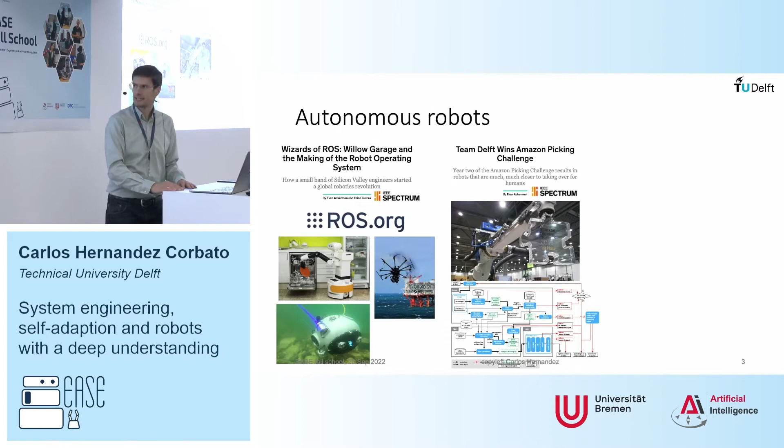The next highlight, this is from us in Delft. We actually did what I was mentioning. We put the state-of-the-art algorithms into a robot that was capable of bin picking in the Amazon Picking Challenge. We won it one year, and I have to say there was not much research there. We took the state of the art, we used the best of our expertise to integrate such a system, and it was successful. So it seems like, oh, we can just make autonomous robots now.

But you all know that we are far from there, so the third highlight is: okay, when things are really complex and open, we are not yet there. This is a standard example of a robot falling in the DARPA Robotics Challenge, right? This is a bit unfair because robots were capable of doing much more than just that in that challenge. But the point is, at some point, almost all the robots got into trouble, big trouble, basically.

Under the image of the robot falling, there is the engineering team. This is a picture not of them designing the system, but of them probably controlling it, because some robots were only partially autonomous, with others supporting, like saying, I know about this algorithm, so this is what is happening. So there was a lot of knowledge in the room, including humans involved in the design of the robot.

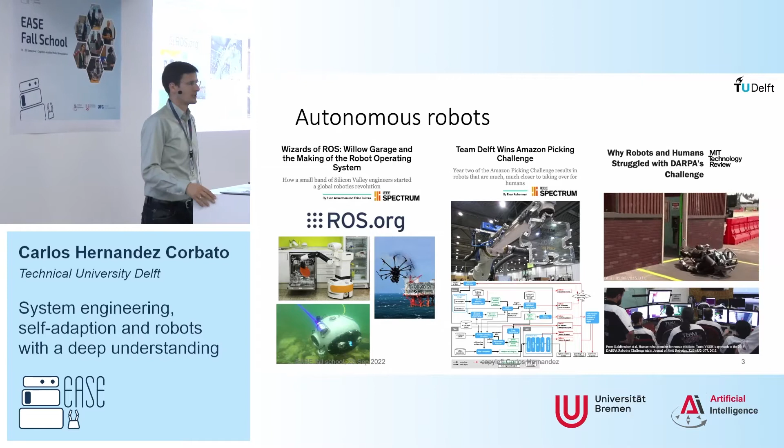So this is the picture of where we are, I think, in developing autonomous robots from an engineering perspective. The question is, it seems to be a problem to integrate them to make a complete application. This is the problem of robot control software architectures, when we put everything together in a software architecture that needs to run in a real robot.

So what is the problem exactly? I hope you are familiar with the three-layer paradigm in robotics. Every robot has its own architecture, but people typically assign these layers: a deliberative layer, an executive layer, and some control skills at the bottom. The top level does the planning, gets the mission, the task the robot needs to make, the human level understanding of it, and processes that into commands closer and closer to the variables in the world—the sensory motor loops, basically forces, speeds, pixels in an image, etc.

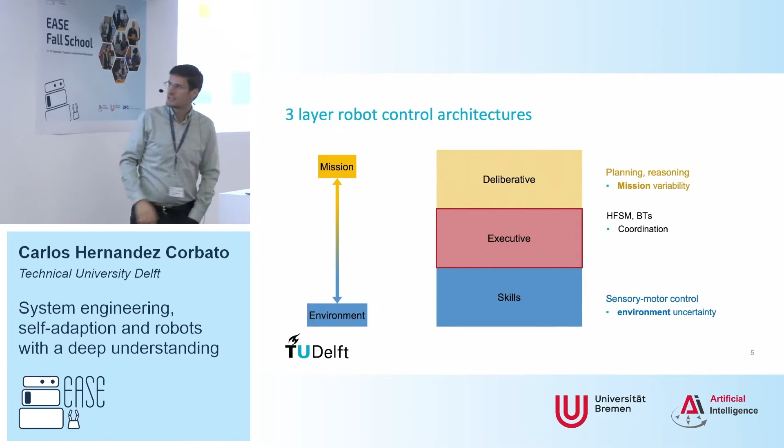So basically, there is abstraction in the processing in the robot that goes from the mission closer to the environment. It's clear what is in the deliberative layer and what the sensory motor control does, handling environment uncertainty. But what's going on in the middle part, in that executive? Typically, people use coordination mechanisms like finite state machines or behavior trees, now very trendy, to coordinate the execution. But that's not the only thing happening.

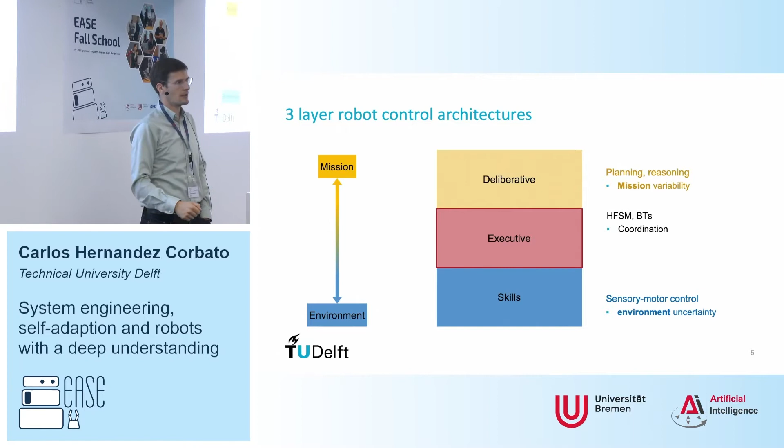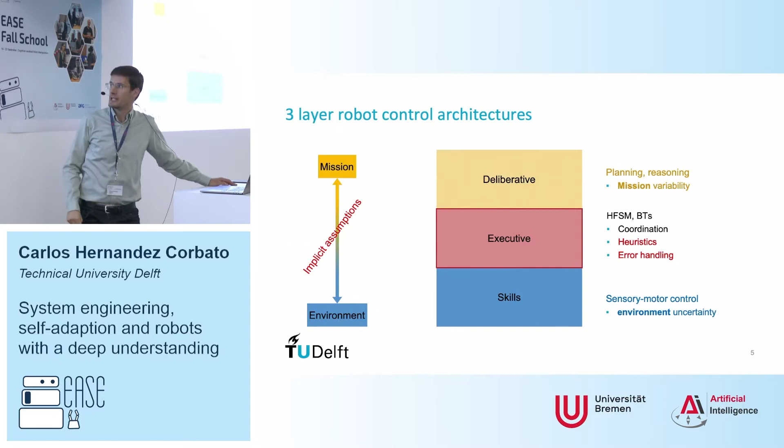How many times were you trying to plan a path and move, or your planner could not find a solution in the middle of the application? That's a problem—how you cope with that. Then you keep trying alternatives, tuning it so that it works in your scenario. Then you put the robot somewhere else and it stops working, it cannot find a plan again. So there are a lot of heuristics based on the application and error handling going in there. And those are different from the abstraction, the composition that we were talking about.

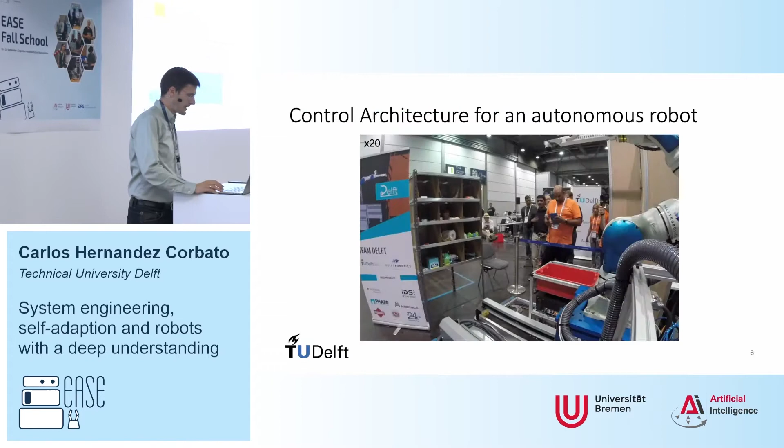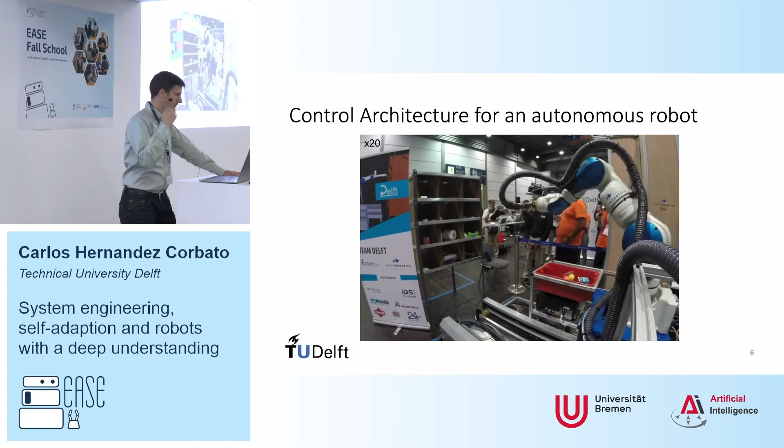So a concrete example of what is going on here. Our system was basically a pick-and-place system—I'm not going to explain it, I think everyone here knows how this works. We were using RGBD to detect the objects and their pose, standard algorithms from more than six years ago now, I think.

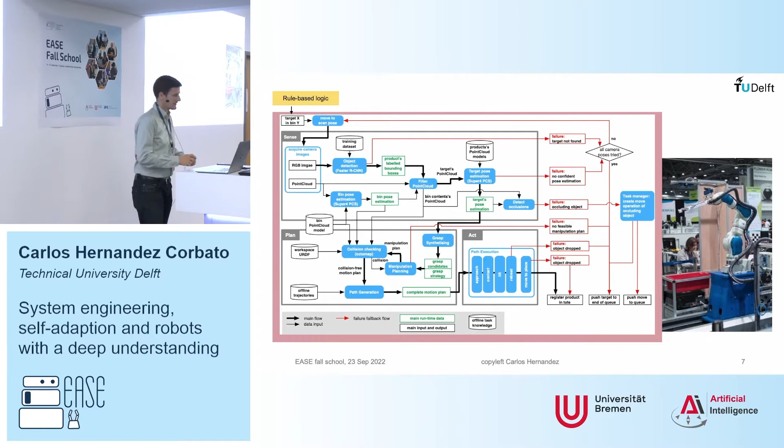Maybe the pose estimation was not certain enough to be confident to plan the motions, or there was some occluding object, or there was no plan found to move the gripper, the end effector, or the object dropped, for example. Many of those are just cramped in there. And no matter how clean you try to make this, everyone struggles.

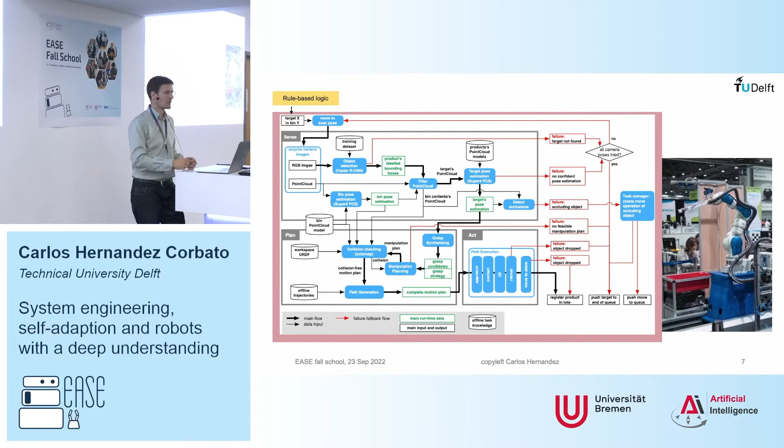In the best case, maybe someone taking care of the design of the system puts it somewhere that is actually more findable. But the whole point is, the whole reasoning of the robot is not aware of that. There is no reflection on that. There is no declarative knowledge about that in the system.

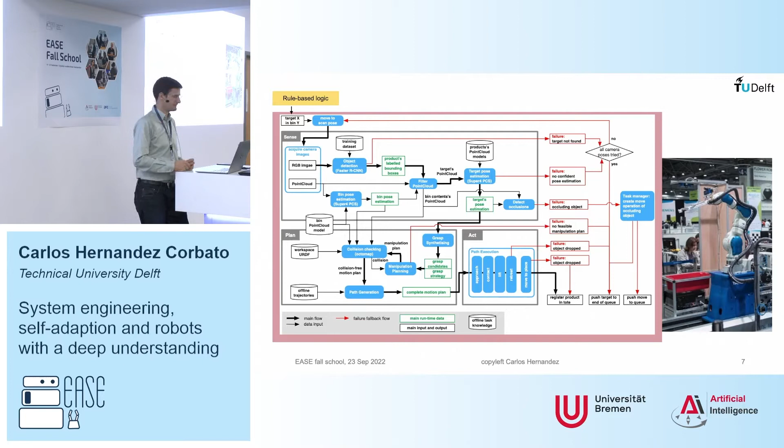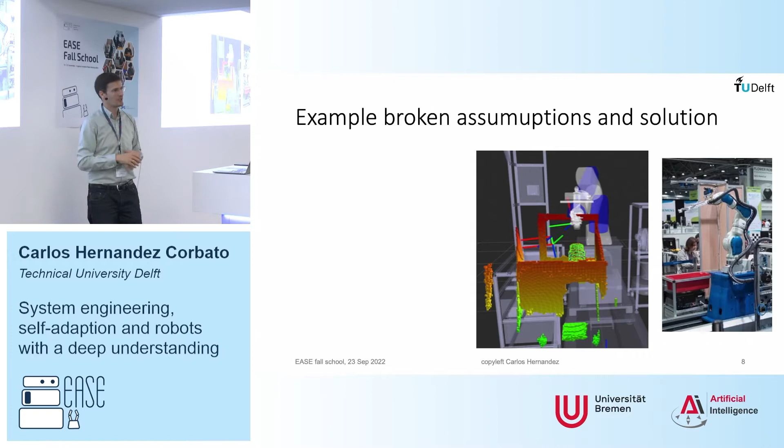Of course, this was an early version of the design. So when you are testing your system, the people from planning put their algorithms, and the people from perception have just released, like, yeah, this is the collisions that we get. And this happened. One solution was to put the blinders down in the room, and then we get perfect collision, but that doesn't really work in the open world.

So we got to another solution, which was to use information we have about the environment, because we knew there were shelves in the environment, and we can actually get 3D meshes of that precise shelf and estimate the position based on what we were seeing, and just add that to the octomap in MoveIt.

I'm already talking a bit about something I hope everyone is familiar with. If not, this is the ROS library for planning that students start with, and everyone later tweaks or creates their own because it doesn't work for their case, which is a bit unfair for what it can do.

So we came up with that solution, but there are other solutions possible, actually. Can anyone think of, I don't know if you have run into these issues, what do you do if you don't have perfect collision models out of your perception pipeline?

Maybe you don't need them. So if your robot is compliant, we humans sometimes manage through tactile feedback. We may try to go, we detect a collision, and then we avoid it. So maybe we don't need a perfect visual pipeline, for example.

So what determines which solution you take? And more importantly, we are making this solution now when designing the system. But if the system is supposed to be autonomous, shouldn't the robot make this decision? More importantly, how can the robot decide that such a decision is needed? Because here, it's only going to find out when it breaks.

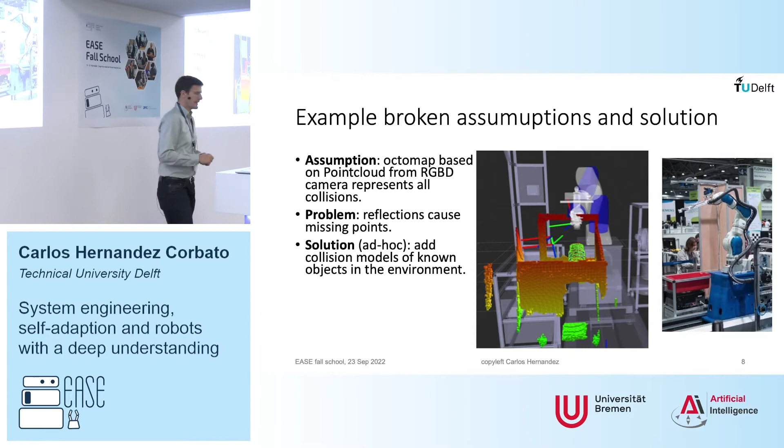So this is exactly the approach that we are taking. And the thing is, all these decisions are about the system itself. They depend on the environment, on the mission, but they are decisions about the system. What is in the robot? How does it work? Which components does it have?

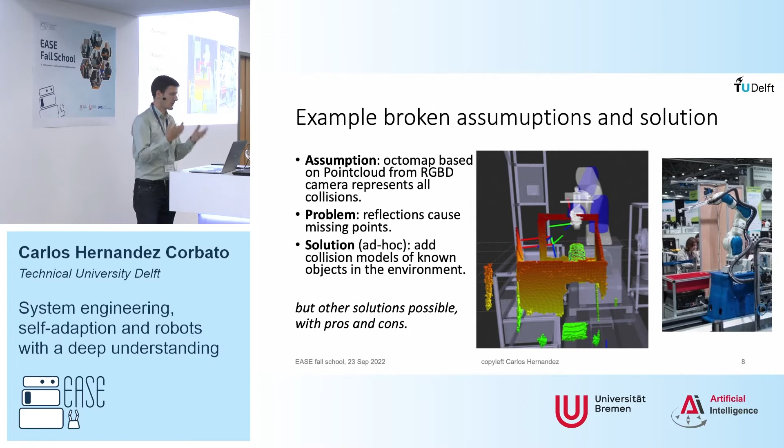So our approach is to add one dimension here. We had basically this dimension moving from the mission into the environment, in the abstraction of the processing that the robot is doing. But we need to account for the system also here.

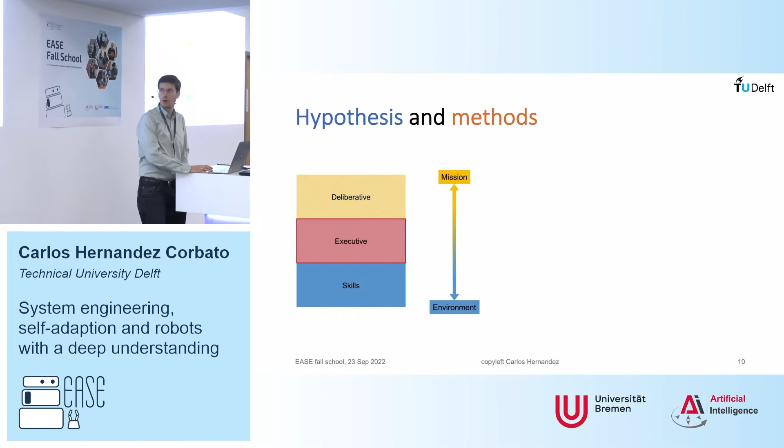Our approach is a bit complex in this table, but I'm going to guide you through it, and this is going to be the organization of the rest of the presentation. Our idea is to separate system concerns because they are not explicitly represented in current robot architectures. If you're familiar with software engineering and separation of concerns in programming, that's exactly the idea: remove all those ad hoc decisions about the system, mixed with the coordination of the task.

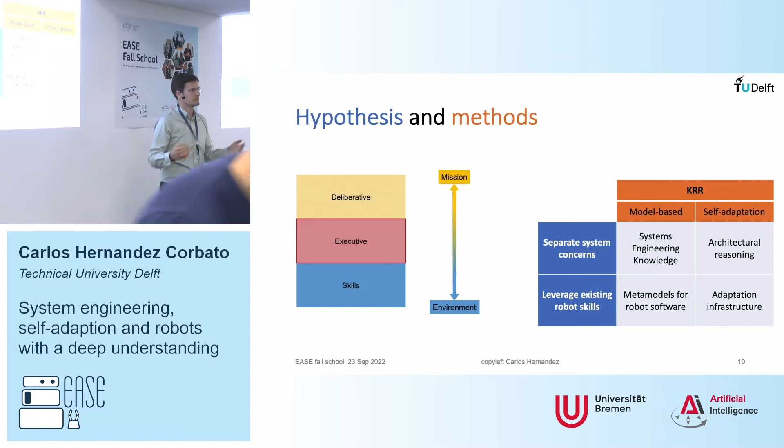Another important departing hypothesis for us is that using what we already have is going to work. This is something people considered before, like, if we teleoperate a robot, it can actually do stuff, right? There was an experiment, I think in 2010 or more than a decade ago. Everything seemed possible if you have a very dexterous operator of the robot. So the problem is on the decision-making and the control that the human teleoperator is doing.

In the last decade, low-level control, basic perception, and motion planning have advanced a lot. That means we should reuse that.

Here is a completely different approach. I haven't seen John Laird talk here, but I know the SOAR approach is to try to build a cognitive system from scratch with these principles. So this is another approach—an engineering approach to robotics, a bit farther in principle from cognition. We already have all these methods, so let's actually use them. We're not going to reinvent them. We're going to put something on a different dimension next to those to make the system actually work autonomously.

To realize those two hypotheses, we are going to use knowledge representation and reasoning methods. I'll explain why. We are going to use two methods: model-based systems engineering, which I'll talk about a bit now, and self-adaptation, a topic in software engineering with two decades or slightly more of development.

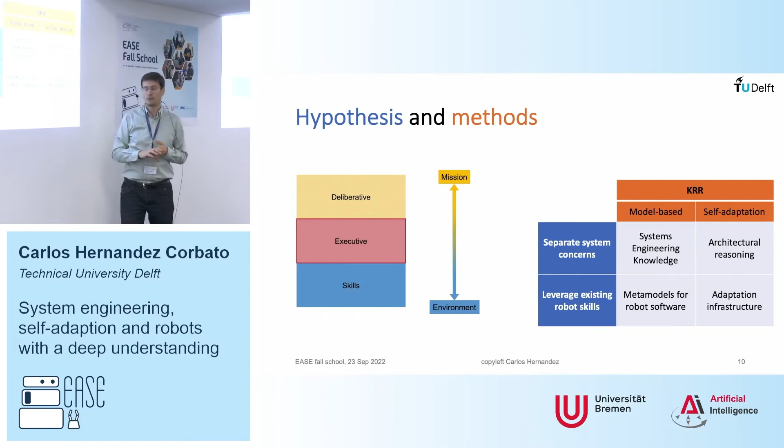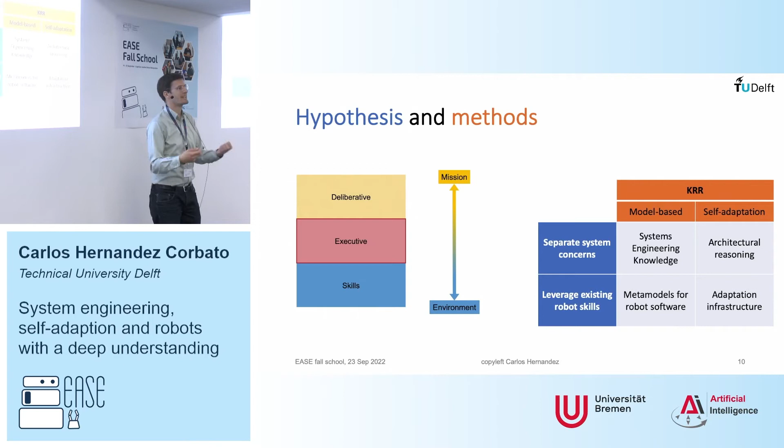This will result in having systems engineering knowledge in our system, having architectural reasoning incorporated in that dimension, and to use the current skills we will have meta models for robot software and we need an adaptation infrastructure. If we are going to include adaptation, so the system can actually select components, we need to figure out how to make that possible—what are the adaptation actions, what monitoring and sensing information about the components in the software do we need?

So why knowledge representation and reasoning? Apart from that we very much like symbolic reasoning, at least I do, we need declarative knowledge about this. Why? Because we are talking about metacognition. If cognition is what the system is doing—coming up with action plans, perceiving, etc.—we are going to be talking about how the system is doing that on top of that. So we need metacognition and reflection. Most importantly, we need to be able to reuse our solutions, integrate them in existing systems, and have them extensible, so if there are new skills, we want to be able to incorporate those.

All this we can do much more easily with a declarative approach, and logic-based. Why? Because engineering knowledge is mostly rule-based, heuristics, and because it's very important that we can verify our solution. We need to be able to trust that the system is adapting. I'm going to speed up a bit.

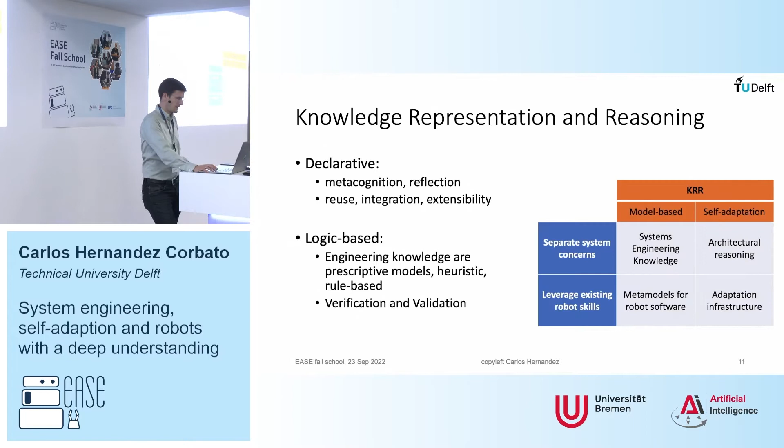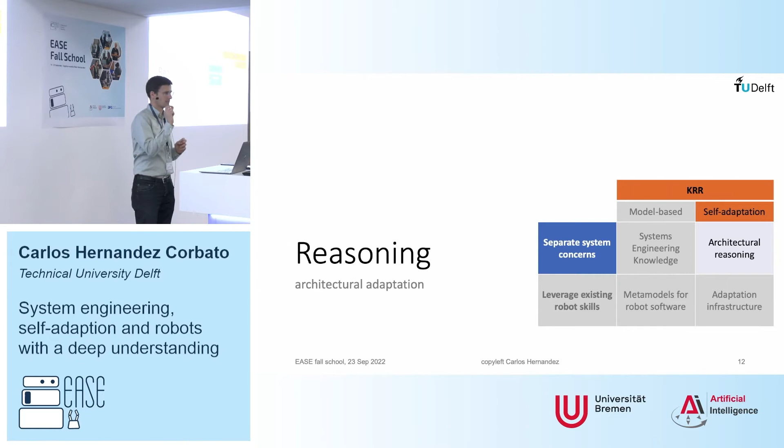So I'm going to go through these four aspects. The first one is architectural adaptation—we need to reason how to adapt the robot control architecture. I'm going to give a crash introduction on one slide to self-adaptive systems. Is anyone here familiar with self-adaptive systems in software?

I see some nodding, okay. So the idea is very simple. A bit more than 20 years ago, there was one of these software crises—software systems were too complex to manage. The immediate solution is that we need to automate the managing. If we have people managing those systems, we automate that, and now we have another subsystem, which is the automatic manager, or the manager of the system.

They formalized the idea in a well-known paradigm in that community, the MAPE-K conceptual model—basically we have our system that is now being managed by a managing system. And the managing system, surprise surprise, follows something similar to sense, plan, act, or as they decided to call it: monitor, sensing both the managed system and also the environment in which that system is executing.

Then it analyzes, or perceives, or relates what is seen with its mission, basically. What are the goals, the requirements? And then it also determines which adaptation, then plans how to adapt, how to change the system, and then it needs to execute or act. That's what robots do in the real world. Here it's at the meta level, let's say.

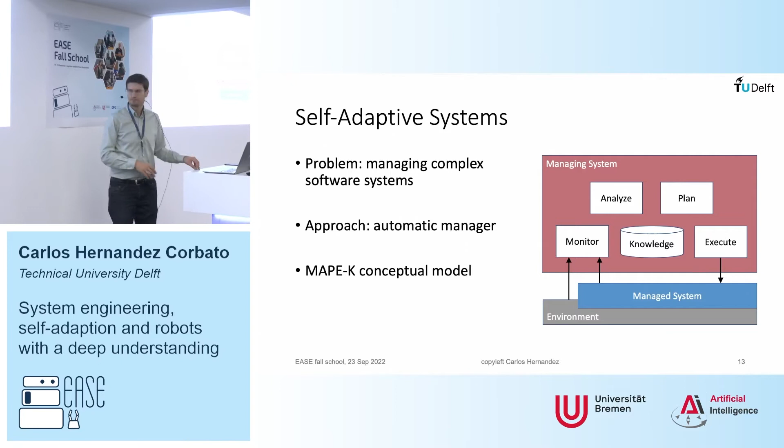So basically, those methods are very interesting, and actually we use them. But we need something more cognitive, because we need a robotic system to manage information that is very heterogeneous, a lot of knowledge that is heterogeneous. You cannot apply one simple Markov network, basically. A robotic system has many other aspects, right? And the problem is that we want to manage all that together in one system.

Okay, so after all this, I'm going to show you a video. I want you to pay close attention to it.

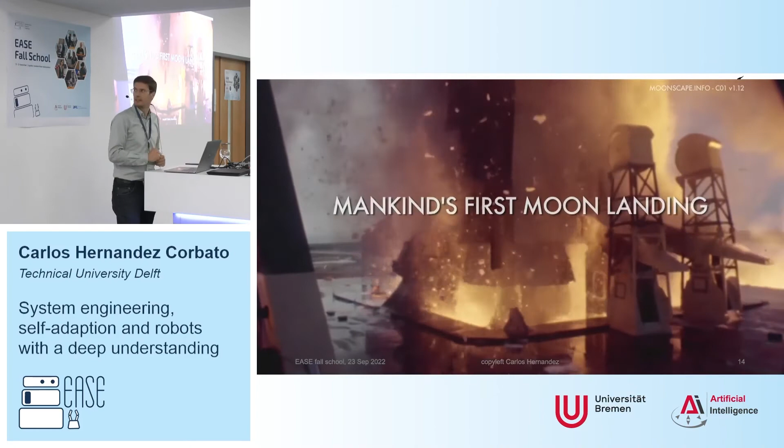All engine running. Liftoff. We have a liftoff. 32 minutes past the hour. Liftoff on Apollo 11.

I hope you are paying attention. I was aiming for a higher volume, sorry, to wake everyone up. But I think a rocket going up the sky is always something to wake up to. So, I think there was a spoiler everywhere, right? This is the Apollo 11 mission.

So why am I showing this video? What made the moon landing possible, or not, according to some people? Some may say the rocket technology, right, and von Braun. Software? I actually, well yeah, a bit, but you will be surprised. Engineering, in general, yes. So there was a lot of engineering, many disciplines, from rocket science to software.

So I'm going to talk about another one, which is systems engineering. This is a paradigmatic example of an engineering program that required managing complexity, and that's what systems engineering is about, basically.

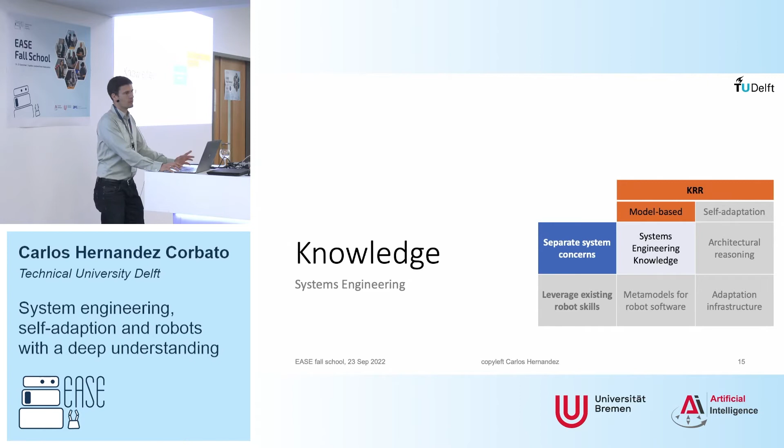So let's talk about that knowledge that made that possible, and why I think we need this also in robotics. Systems engineering is basically a framework to integrate diverse engineering disciplines or specialties. And here, especially at this Fall School, you can see how robotics is also very interdisciplinary. Aerospace is also, even if there is one word for it, there are people working on many different things, from chemistry to material science to flight dynamics. And the systems are very complex, right? You don't do systems engineering and complex architectures for a very, very simple system.

According to IEEE, and that's why I put this definition, systems engineering is the interdisciplinary tasks which are required through a system's lifecycle to transform customer needs, requirements, and constraints into a system solution. And I want to stress here customer needs. This is kind of a business-oriented definition, but if we talk about robots that interact with people, it's our needs, basically. They are systems that we build for a reason, to render some value to us, basically. And this is very important.

This is very important because in the end, we want the robot to do, maybe not to put that object there, basically. We want the robot to order the shelf, for example, in the supermarket. And sure, they are related, but sometimes it's not exactly the same thing, and there are other values involved. So maybe I want the robot to put that there, but not if my hand is there, because there's another requirement that maybe it shall not crush my hand with the jar it's trying to put, right?

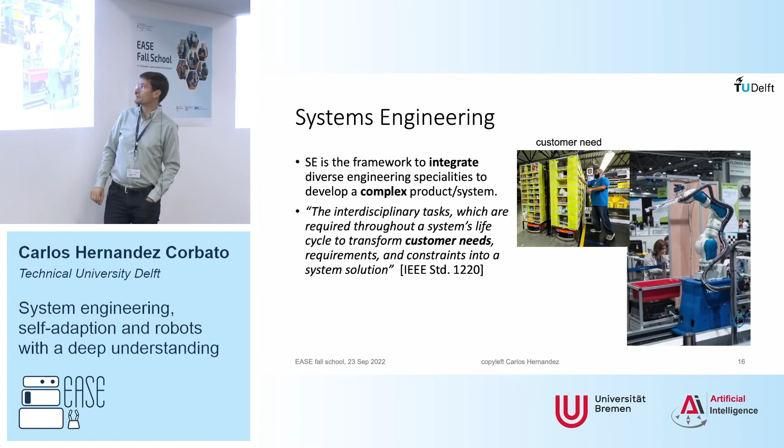So this satisfaction of the customer needs, this thinking of the high-level values of the user, is what distinguishes systems engineering as a discipline that integrates all the engineering disciplines to achieve a common set of requirements and mission of the system. So in this case, for example, the customer need could be considered to replace that person with a robot, actually. That's what they needed, in a concrete case of a certain logistic infrastructure in their warehouse, basically. Maybe not in another one.

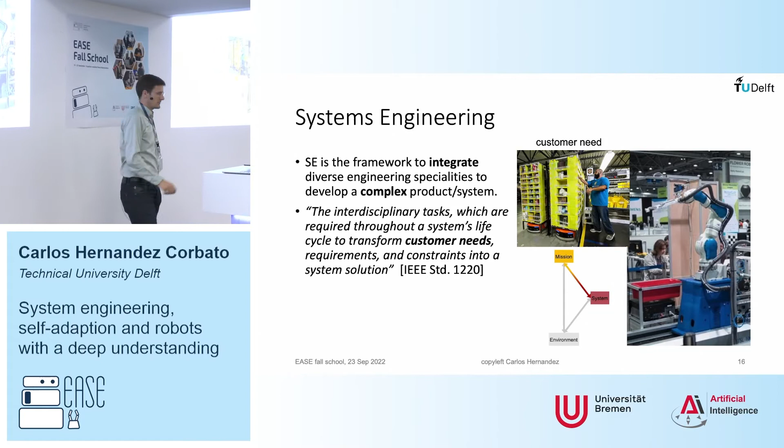So we are talking about the relation between the mission and the system. This is where systems engineering comes into play, because there is a lot of knowledge generated in that discipline on that relation, and we need that relation in our systems. So I'm going to speed up a bit.

Systems engineering has more than 50 years of history, or almost a century depending on what you consider its starting point. But only recently has it actually started being automated and creating formal models. Before, everything was in thousands of documents, basically. That's the main artifact of work for engineering teams. Lately, with model-based systems engineering and taking inspiration from software, how many of you have heard of UML?

Now there is SysML, and a second version is happening as we speak, with multiple releases now. It's a language to describe the activities and the results of engineering a system, the decisions being made, and the architecture of the system. This allows automation, and this is the key here. We can leverage that for the knowledge in our robots, if we have formal knowledge about that.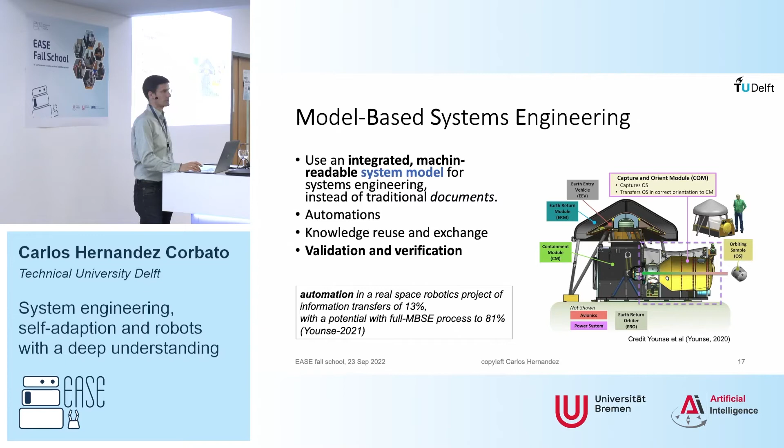There are many approaches to systems engineering with different vocabularies. Some are shared, and there are associations about it. So we are developing our own approach with a complex name, ISE and PPOOA. It's also partially based on software. The important aspect is that it's based on the functional architecture. The focus is on the architecture of the system, the functional one.

What's the difference between the functional architecture and the physical architecture? The functional architecture describes what the system has to do and how you can decompose those into sub-functions, whereas the physical architecture is how that is finally implemented in components that may be hardware, physical, but we also call physical those that are software, because they are real things—programs that live in the computer. Whereas the functional architecture is an abstraction, we abstract a representation of what should be happening in the system.

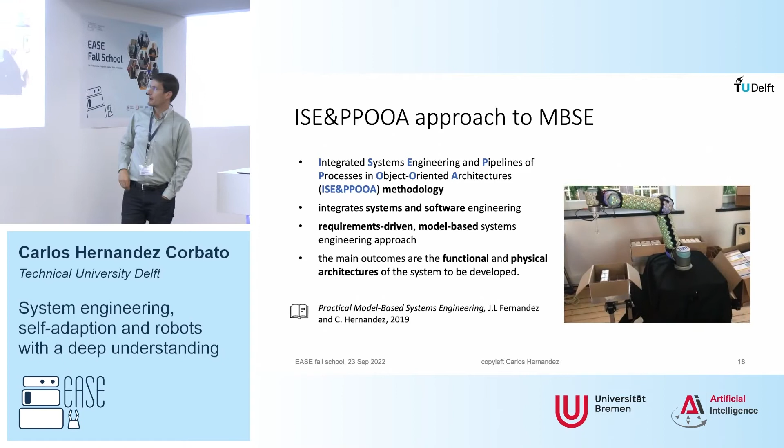We have already been applying that to model robotic systems, to understand their properties, for example, and how our architectural decisions affect their properties. For example, in this case, we had a sensing skin developed by TU Munich, Gordon Cheng's group. We worked together in a European project, and we had different options to use this skin to avoid collisions.

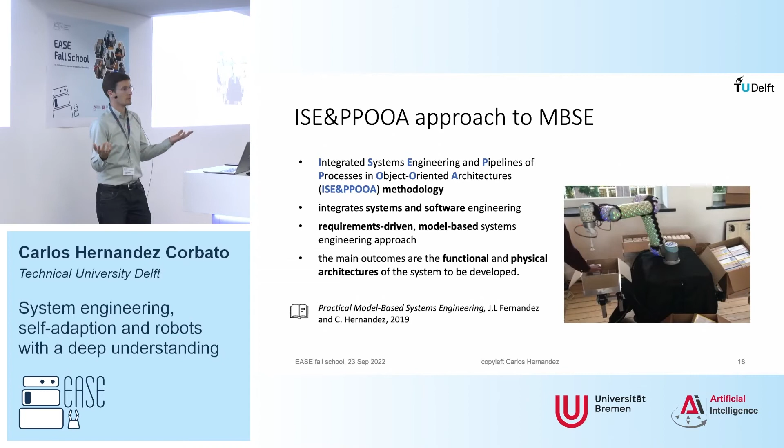One option is the simple one, stopping when the skin detects a collision. We actually worked on a more advanced version in which the system would actually avoid the obstacle, but that was working way slower. So for what was needed for the application, it's a trade-off. Also, it was not safe enough because the reaction was not fast enough to avoid collisions—we could not close the online planning loop fast enough, for example. These are decisions based on properties of the system that you need to make on which components, which algorithms to use. And the idea is maybe the system should be able to choose and apply one or the other dynamically.

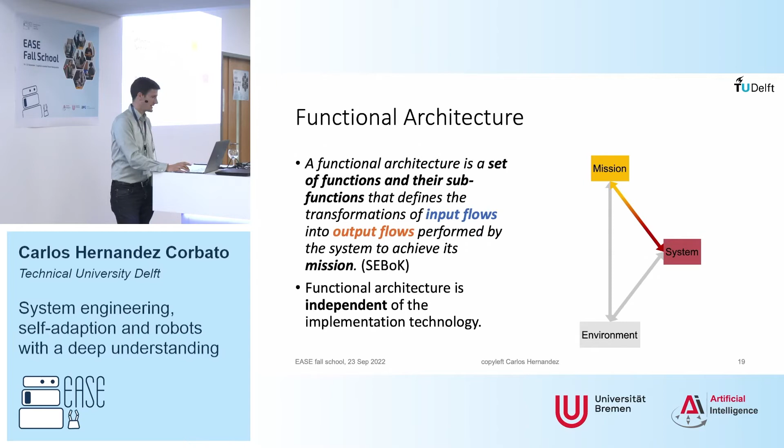I'm going to go faster. Later you can check in my slides and read more about how we model this functional architecture, which goes from the decomposition of the mission into different aspects—for example, a pick and place application.

Then we need, for example, to be able to move the robot safely. That means being able to sense obstacles, but also being able to obtain collision-free trajectories. This is already a decision at this level: instead of using visual servoing, we were obtaining collision-free trajectories, and then we were planning and executing them. But still, we haven't decided with what we are going to be doing that—this is a definition of something to do. Obtain collision-free trajectories: you may apply multiple algorithms for that. So that's the key idea here—we are separating the what to do from the how we are going to do it.

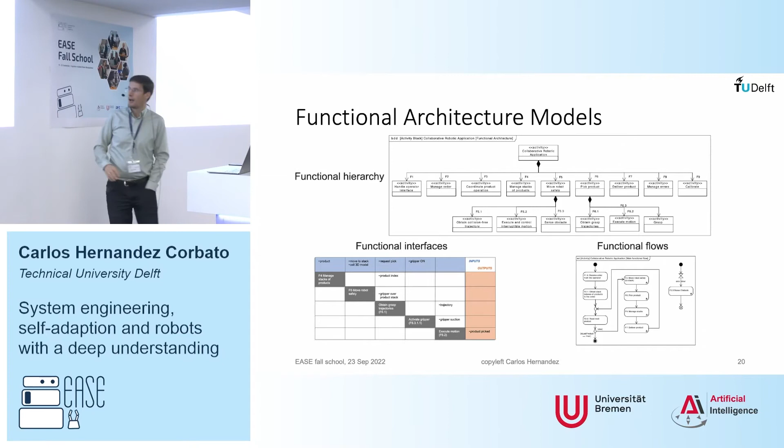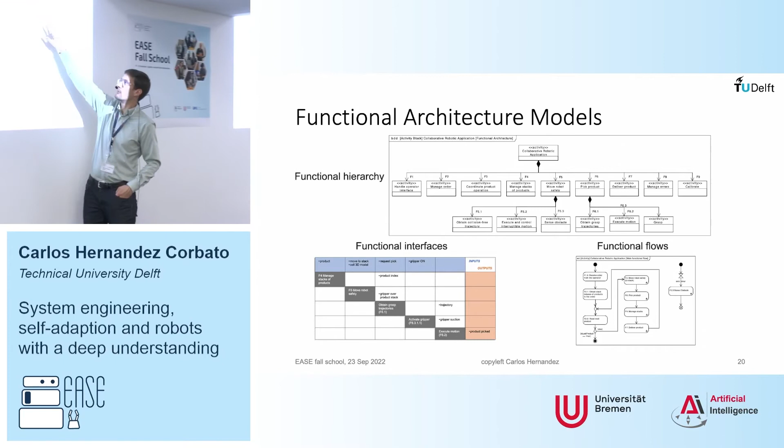This reflects the dependencies between functions. To be able to do one, you may need some others. But actually, they are connected because the product of one function may be the input for another one, and those are reflected in the interfaces, which are also important. But it's also important the behavior—how the flow of execution goes from one function to the other. I'm not going to go into details of that, but I'll just mention that for the moment, we are able to model this and use this knowledge—which function depends on which one—to make decisions on what is available and what not.

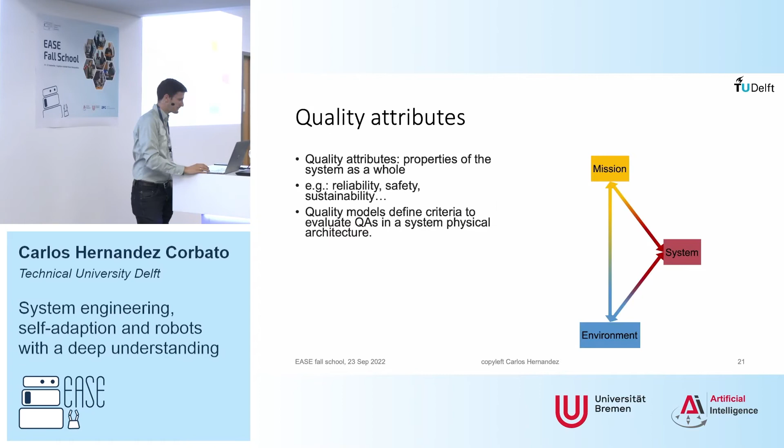Another aspect, apart from the functional architecture, is other properties of the system that are not easily declaratively decomposed, which are the quality attributes. We're talking about things like safety that are inherent to an entire system. A robot may be safe or not if it collides with people at a certain speed, for example. That's the result of multiple algorithms, but it's one property for the system. It's up to the engineers to come up with metrics for that attribute, for example safety. There are multiple ways of measuring safety, and it depends on your application. For a mobile robot, you probably want to keep a certain distance to obstacles or avoid impacts at speeds higher than something. So which criteria to use depends on the application, and these are typically not declarative models. You may create declarative models for that, but it's difficult sometimes. That's still a challenge, but it's an important aspect.

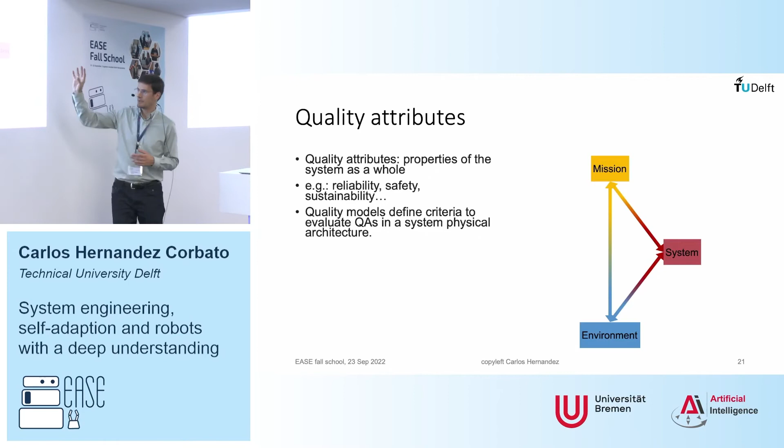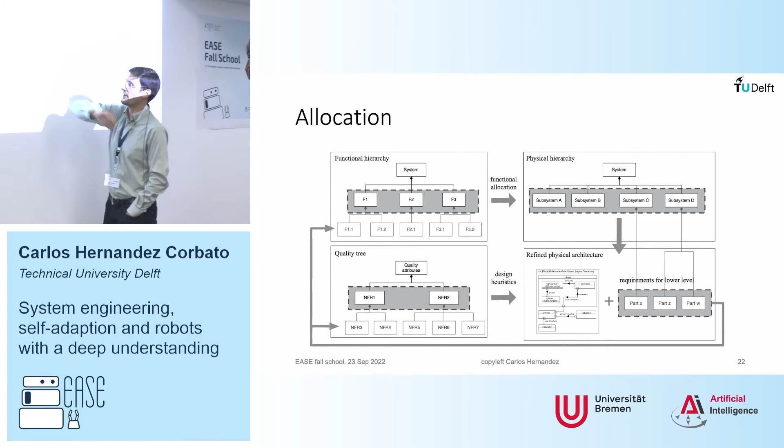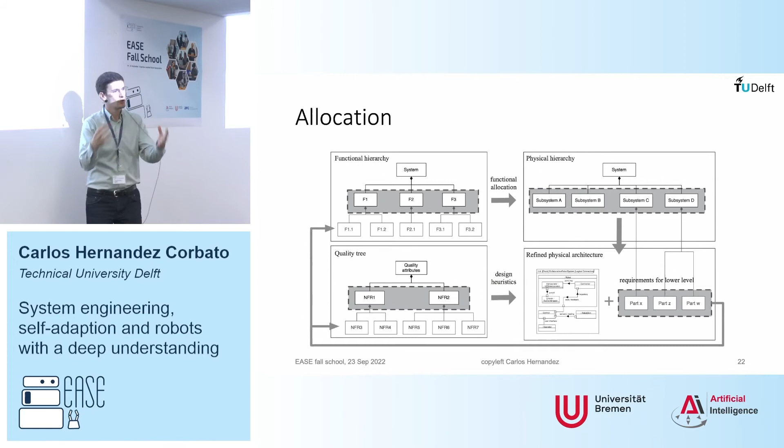How everything comes together - this is a complex diagram, but the important thing is when you design the system, you start decomposing the functions. Then you check how your solution matches the quality criteria for safety, etc. Then you choose algorithms and components that match that criteria, following certain heuristics. So you go from the mission, the big function of the system - to pick and place objects, for example, or navigate underwater following a pipeline, which is another example we're working on right now. That's the general mission, and then you decompose into functions, and start allocating the functions to your algorithms. This algorithm is responsible for doing this or that. For that decision, you make trade-offs using the quality attributes and other criteria to select. So you move from the functional architecture into physical, completely allocated parts in your system.

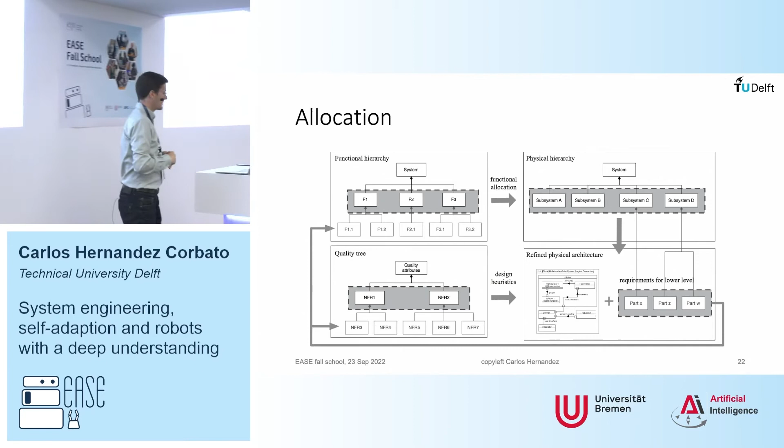Are we going to be using ICP for pose estimation? I think someone was working on pose estimation. So there are many possibilities to do that, right?

So this is about systems engineering and why it can fill in knowledge that relates the mission of the robot with what the robot is - that bunch of algorithms that we are putting together.

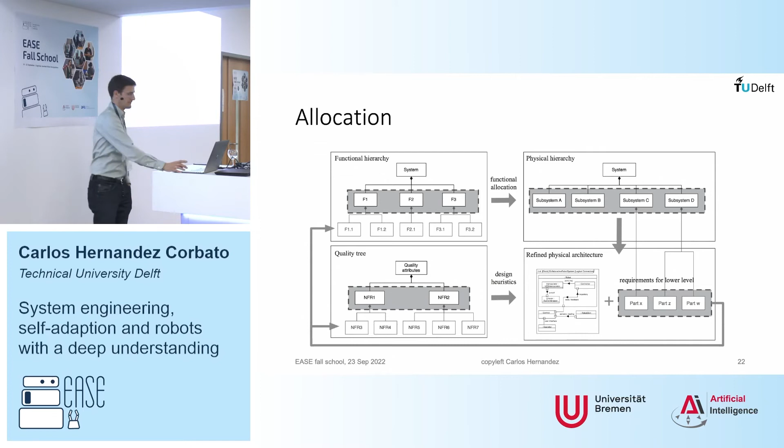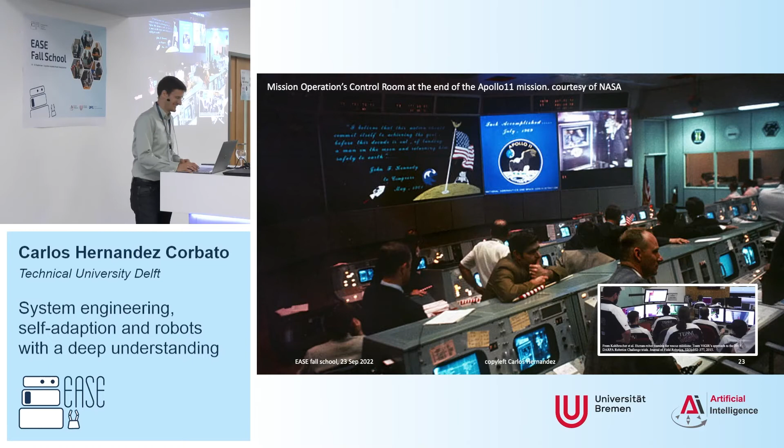Do we have a result from the planning? No. So it's very similar, right? That's basically what inspired me many years ago. Also when I was with my robot, reading the ROS logs back in 2009, 2010, all the time in ROS, thinking maybe this should be automated - maybe what I'm doing should be the robot doing it.

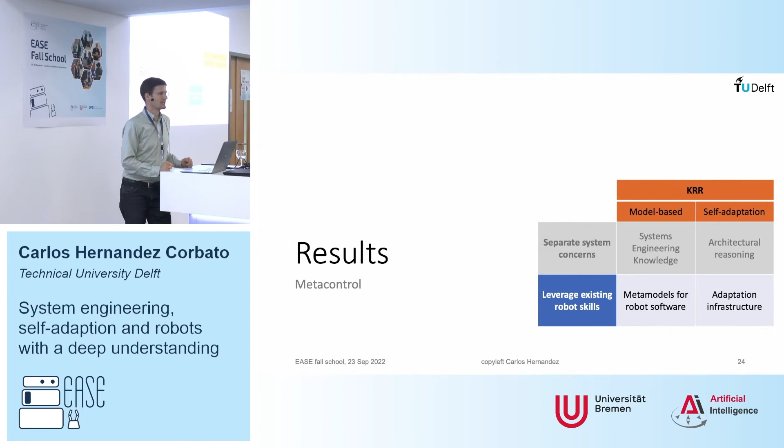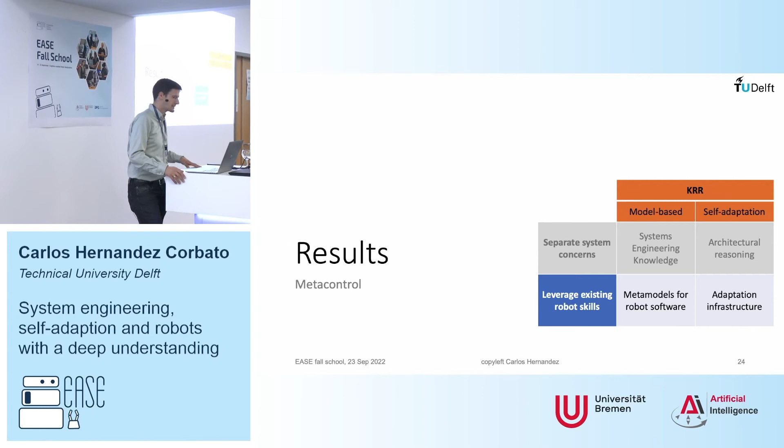So I'm going to guide you through what we've done with all this inspiration and ideas, how we've implemented them by leveraging existing skills in the big ROS-based community. I'll quickly guide you through this. Our approach, we call Metacontrol - because if the robot has its own control in general, concretely what we're focusing on is creating this Metacontrol on top of it. So the self-adaptive model, in our case the system that is managing, we call Metacontrol. It follows more or less the monitor, analyze, plan, execute structure, or sense, plan, act, whatever you want to call it. But we use a runtime model of the architecture of the system - that's the knowledge we use to adapt the robot control software.

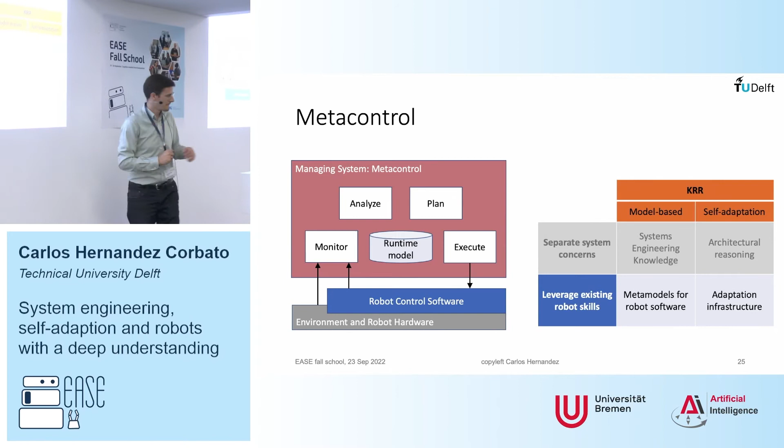Concretely, this is the meta model. Does everyone know what a meta model is? If not, if you know what an ontology is, then you are good also. There are papers on meta models versus ontologies, so I'm not going to enter into that.

But basically, this is how we represent the architecture of the system. You should already be familiar with the functional hierarchy. That's one part of the functional architecture, the simpler part that connects functions with each other, so we know which one depends on which one. So we are capable of modeling that. We model that with functions, and function designs are versions of the physical architecture.

So if this part is the design information, well, the system is actually implementing at runtime that design. And that's different from the design itself, right? So this is the difference between an object and a class. Something, a running artifact - so we need to capture the state at runtime. So is that function actually working or not? Which safety is associated to it? Which concrete value - not the one we want, the one it's actually rendering.

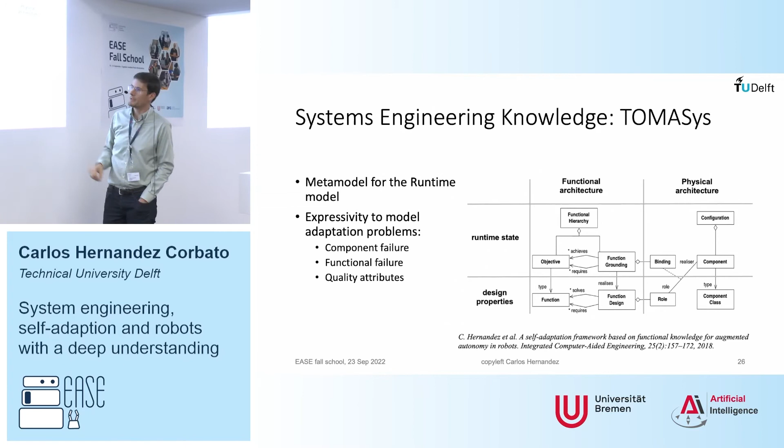So we have also elements to capture the runtime state. And with these elements in our meta model, that we call TOMASys, teleological ontological model for autonomous systems - teleological because it's about the goals of the system, ontological because it's about what the system is.

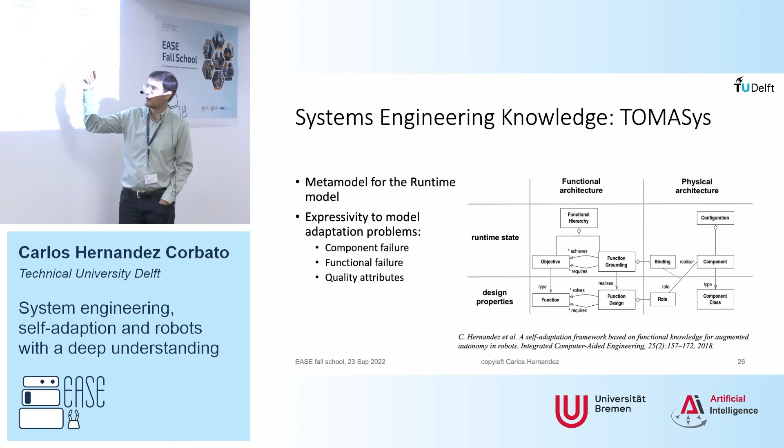So it should be able to model situations like a component failure or a functional failure of an entire subsystem, of the quality attributes - what's the value of the safety, how is that impacting the system. So our hierarchy can model that.

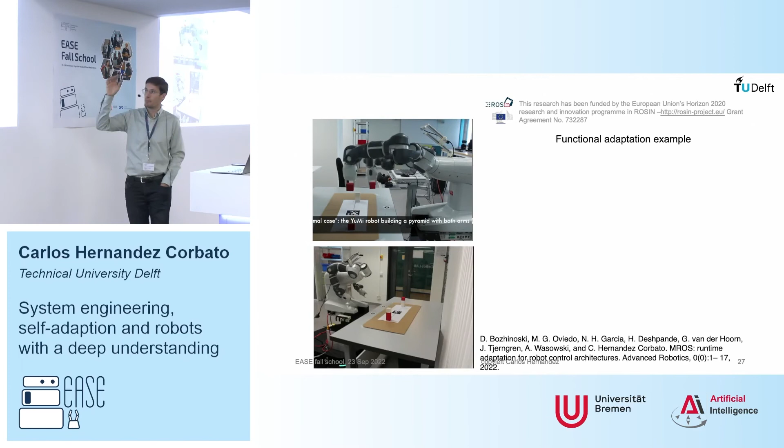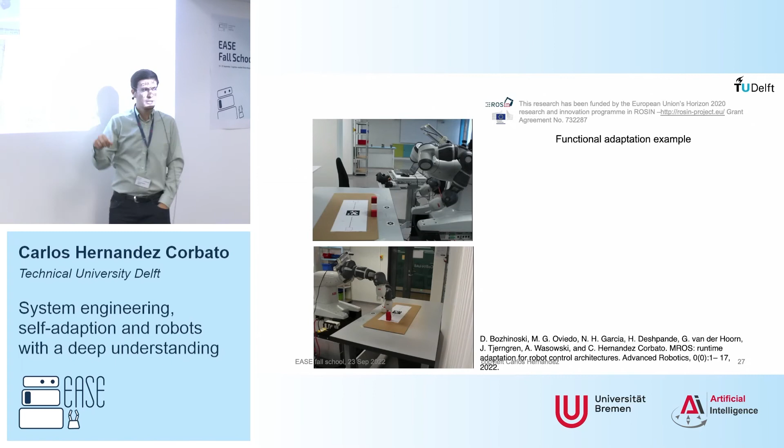One example, very simple: mobile manipulation problem. The YuMi is building a pyramid with both arms. In this other video, it's starting to do it with one - then our colleague touches one, safety alert, so that arm is blocked just in case, but the system is capable of continuing using only one arm. So it's a different strategy that requires different components. Now the system actually has to move the base to have reachability, for example.

So how do we model this with our meta model, so as to be able to reason about these options? So we have a function which is to pick and place blocks, and we can do it with one arm or with two arms. With two arms, what you've seen is a completely scripted state machine in the ABB software. So we cannot reflect internally on what's going on, but we can reflect on the fact there is an alternative.

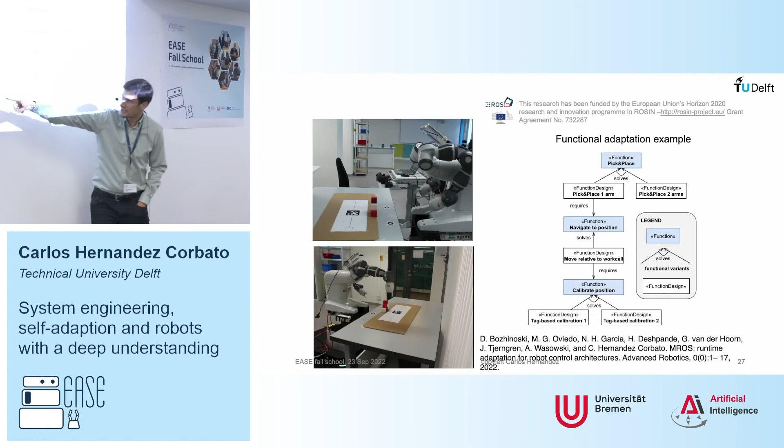And this alternative is actually a bit more modular because we were using some ROS components to be able to navigate to the pose. To navigate, we were not using standard move base, but actually the robot uses markers to locate and calibrate its position with the table. So basically, to move relative to the table, it needed to calibrate the position. To calibrate the position, we actually had different options depending on the lighting conditions. And the system can reason on all of these things as far as there is knowledge on that.

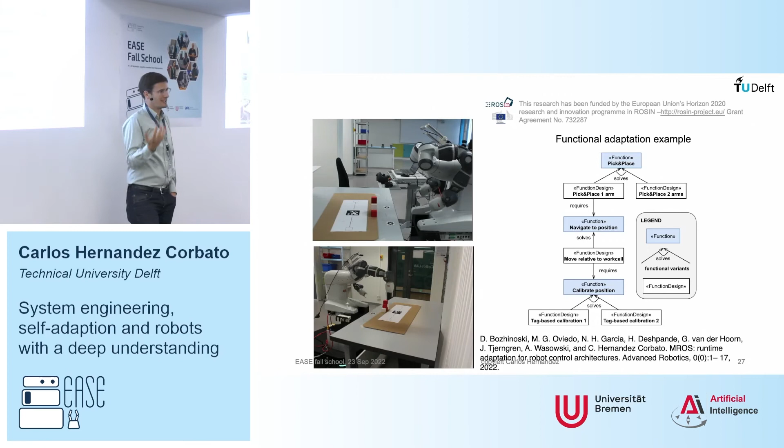Our meta model allows you to define the depth of that knowledge. It's depending on what you actually need. If some parts of the system are actually a black box that you cannot adapt, then you don't need to represent them.

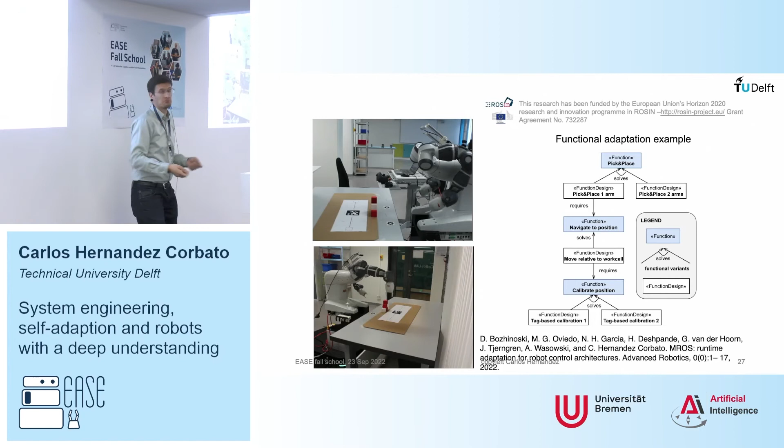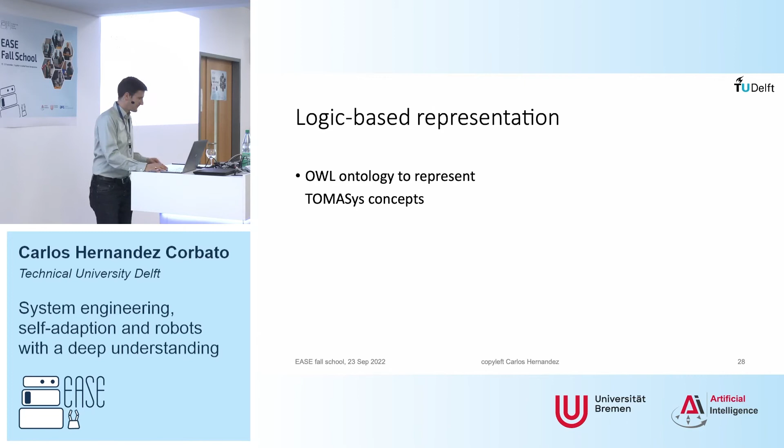Following up, this meta model has been implemented in a logic-based representation, formalized in OWL, and using SWRL rules to account for quantifying things, quality attributes for example. So we have rules that determine - very, very simple rules - that a function can only provide its functionality if all the components that are required are present and not in a failure status, for example. So there are very simple rules, but composed, they allow you to really diagnose what is going on in the system, and not only the running system but the different options, because another option may also not be available if it depends on the same component, for example. So it's very simple, but it's very powerful to at least reason in a way that is general and reusable in many, many systems.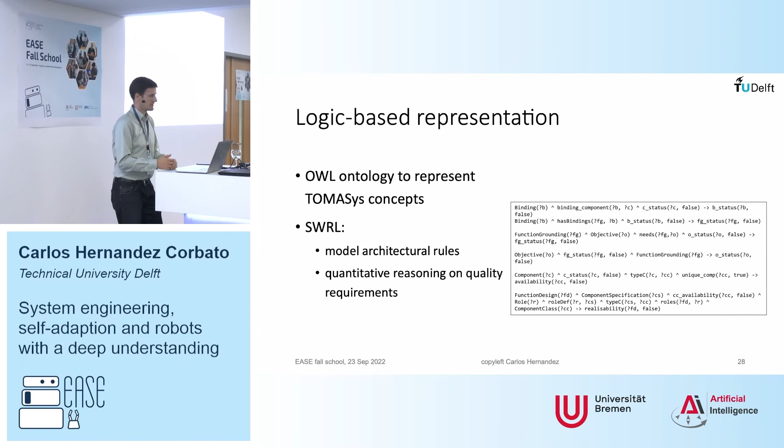A completely different example - I promised you some underwater robots, and you got a talk by Peter the other day, so I hope you are familiar with thrust and all these things. In this case, there were 8 thrusters in this ball-like robot. This was a different European project.

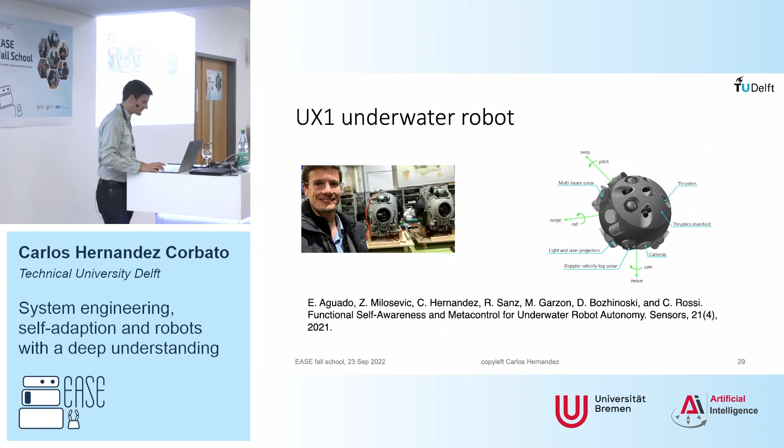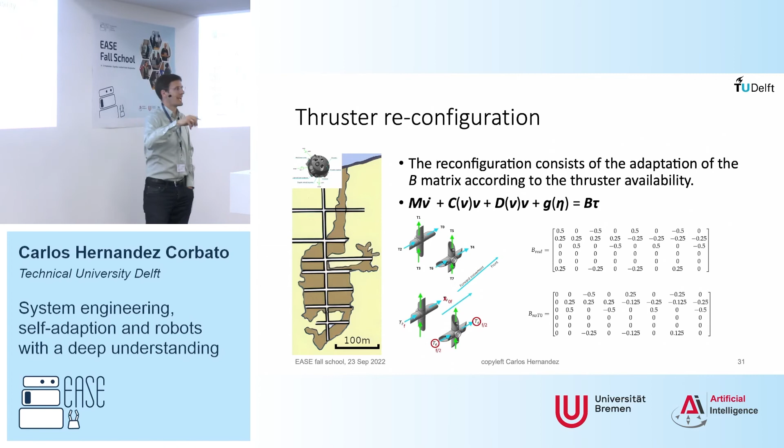This is just for the marine robotics fans. You not only activate or deactivate thrusters, you need to change the matrix that allocates thrust to each one to achieve the desired propulsion overall.

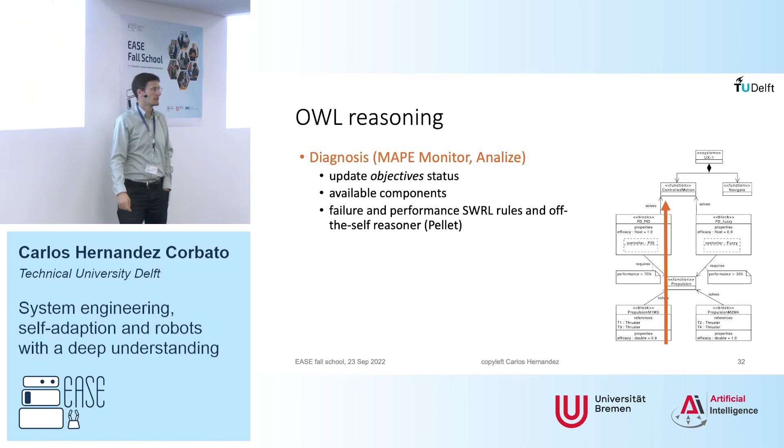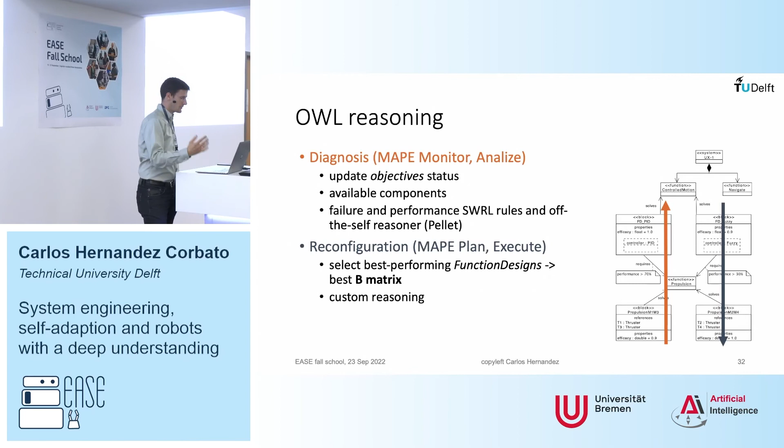So our reasoning uses the rules to, from the state of the thrusters, understand which functions are in danger because we don't have enough thrust in a certain thruster available, etc. And conversely, we decide the reconfiguration of thrusters based on that. All this corresponds to the monitor and analyze when diagnosing, and the planning and executing the adaptation when deciding which thruster to activate and which allocation matrix to use.

Not everything is symbolic here. We actually did some machine learning because quality attributes are harder to model with symbolic reasoning.

So how do you decide to change to a different configuration for your navigation system in a mobile robot, for example, based on safety? You have many possibilities to configure, for example, move base. I'm not sure if any of you have played around with move base for a mobile robot, similar to MoveIt.

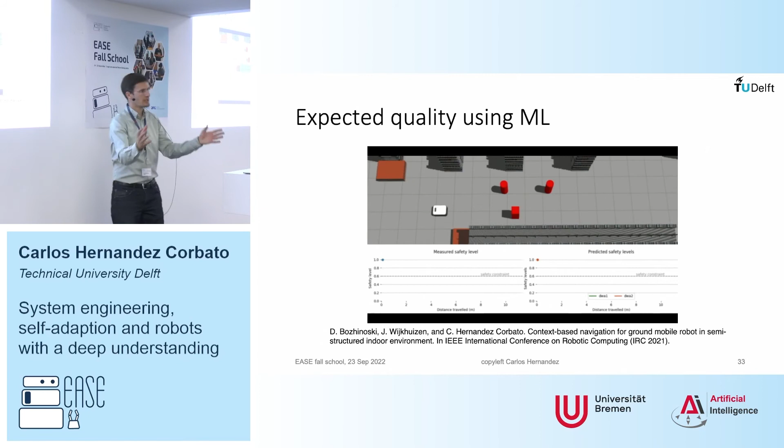You need to decide a lot of parameters, and it will work or not for your application. So the question is how to decide, for example, the best configuration for the dynamic window approach algorithm that is being used there. So we tested multiple, and together with a master student, and Darko, one of the postdocs working with me, we thought, well, maybe we can create a model that maps which environment we are in, what are the properties of the environment, and what safety is to be expected of each different configuration, basically.

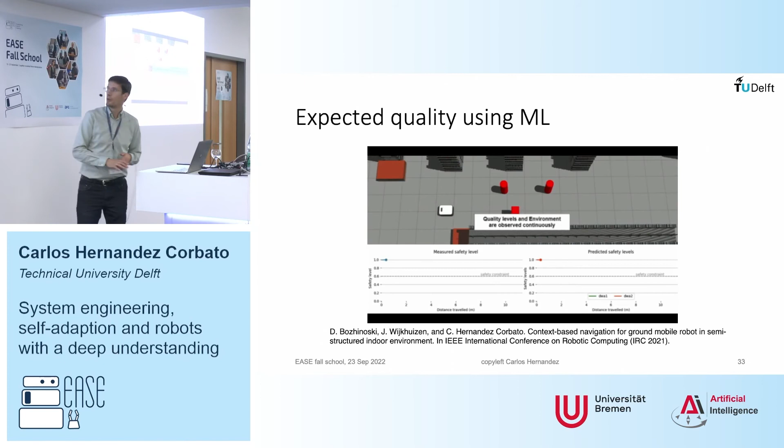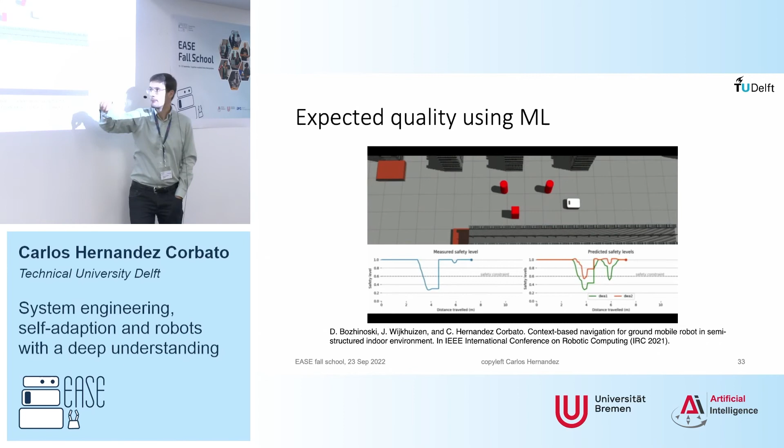So we trained a machine learning model, so it was capable of predicting at runtime. So you have two graphs because there is one that is the configuration being applied at the moment, in green, and the other one that was rendering actually a better safety. So the system, when the safety threshold was broken, would switch to the one with a better safety.

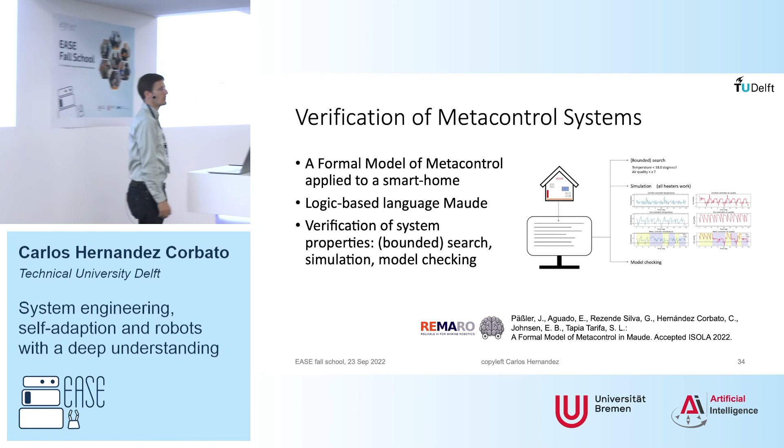I just wanted to mention that we can actually validate, and we are starting to work in Remaro on using different logic languages to basically explore the adaptations that the system would do. So we want to verify that our adaptation engine, our metacontrol, will stay in a space that is the one compliant with the mission.

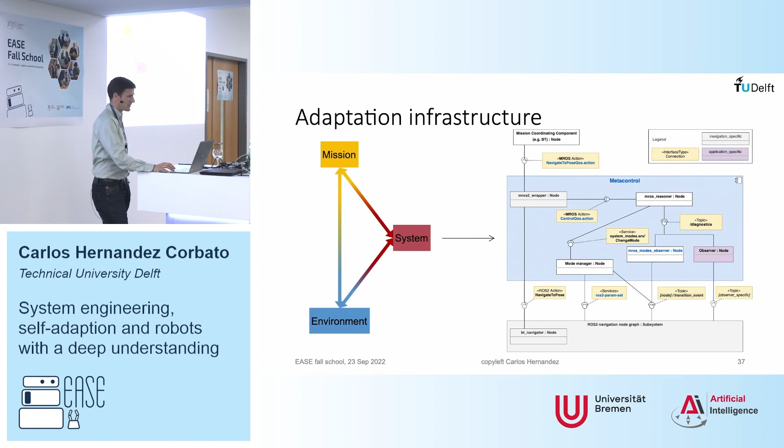I'm going to skip the rest. I'm going to go for this, another example in a different robot. So the big question is, does metacontrol solve our problems?

So if we go back to a robot that is having a partially empty point cloud that should not be empty at a certain spot when picking something, how do we model this with what we have seen till now? Because here is basically the environment affecting. There is no problem in any component of the robot that is running till something actually breaks and maybe detects it.

The safety of the controller of the manipulator triggers, basically, because of the torque applied. Actually, it did not, because this is an industrial robot, really tough, and the shelf is really light, so that was the problem. So it cannot cope with this scenario, because there is more knowledge required.

We need to integrate this with the knowledge in the other dimension that we were discussing, the one that you are normally working on, the one about the mission, about the objects in the environment. We want to map that information, understand that information in terms of what the robot is doing, in terms of picking. The goal is picking that object and not breaking anything.

That's also a very important requirement. We need to understand what the robot is seeing based on that. And here I use 'understand' - that's the deep understanding in the approach that we are taking. The robot is able to relate the sensory input with its algorithms, with the assumptions that are being made, but also with the goal. The goal is not to break anything while picking that.

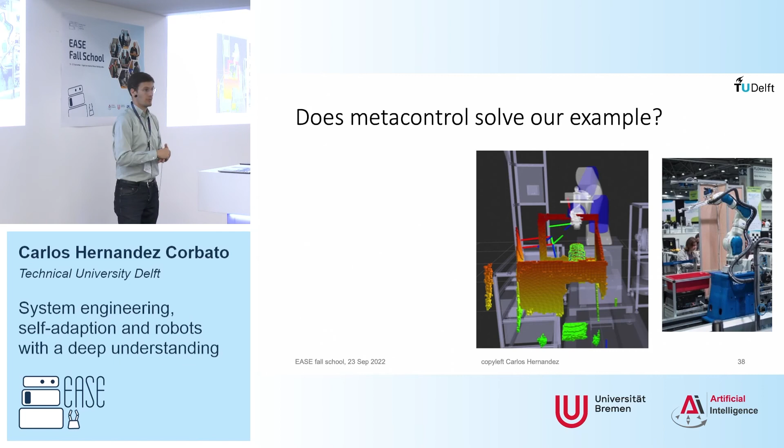But how can a robot make that decision? Only if it has deep understanding of the relation between what it's seeing, what it can do, what it is, and what it's reaching for. What is the overall goal?

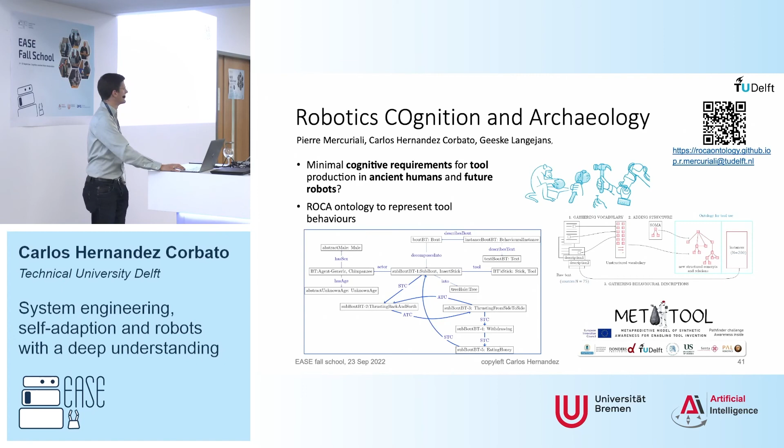Because I ran out of time, that's basically the main message. That goes into many other things. What time exactly is it? Six minutes to answer a question. Okay, then I think I will stop there, basically.

So, just wrapping up, I think systems engineering is also for robots, not only for engineers, and it's for robots to do at runtime, and that's the real challenge. How to represent all that knowledge, because there is a lot of heuristics involved - engineering heuristics, why we choose certain algorithms and not others. Well, we can do hypothesis testing. How can we generate those heuristics? How can we have the robot test hypotheses and come up with that? I think there is a lot to investigate. I got inspired by space engineering, but I also had a slide about other projects on archaeology that I didn't have time for this time. I think hopefully in the future I will present results, because those are actually too early results. So I'm happy to stop here and take questions.